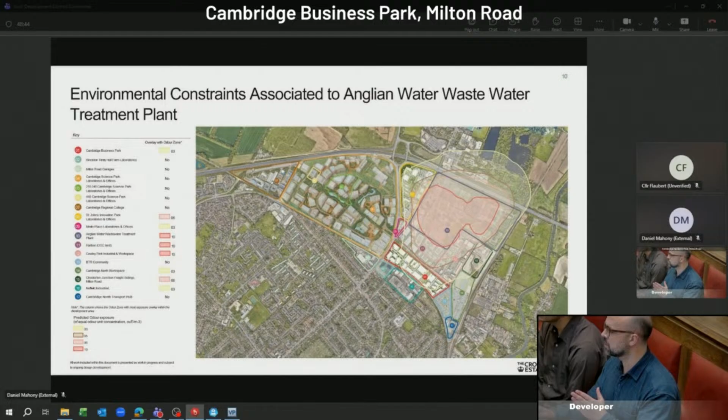So our framework has sought to respond not only to how we need to adapt to what was proposed in Hartree no longer necessarily coming forward in the same guise, but also how we've had to adapt the framework to maximise flexibility moving forward through the process, to facilitate homes potentially coming forward should that odour zone constraint no longer be in place.

This is a parameter plan we've developed which, given the nature of the application as an outline application, shows the land use aspirations. When we last presented to the JDMC, plots N, H3, H1 and H2 were proposed as residential plots. Subsequently, in order to ensure a deliverable scheme from day one, they're now proposed as workspace-to-residential switch plots, which means there are a number of scenarios within which the framework could come forward, varying on whether those environmental constraints remain in place or are removed in future.

Notably, we've also introduced, in response to both consultation and the environmental constraints, the additional opportunity for residential plots at plot K in the centre of the site, and also at plot A on Milton Road. Moving to the next slide, you then see the parameter plan in terms of our land use aspirations and proposals, and the illustrative master plan, which we are presenting throughout this pack, which puts employment plots within the odour zone as it currently exists as the deliverable scheme from day one, noting there is greater flexibility moving forward over the duration of the potential build-out.

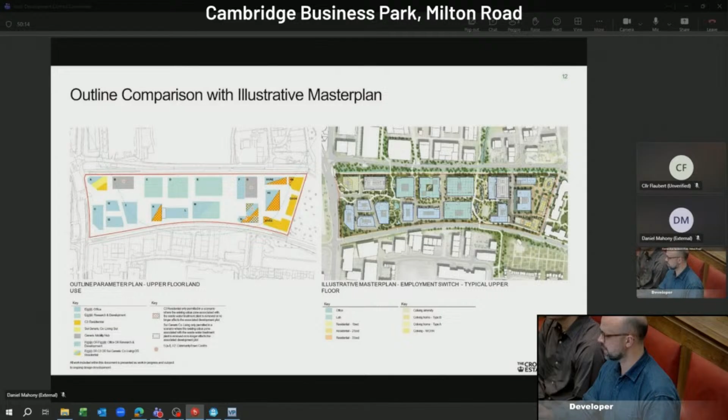Okay, we're now going to take you through the placemaking principles. So we presented a version of these principles to you last time we saw you, but they've since been updated and we've added additional detail.

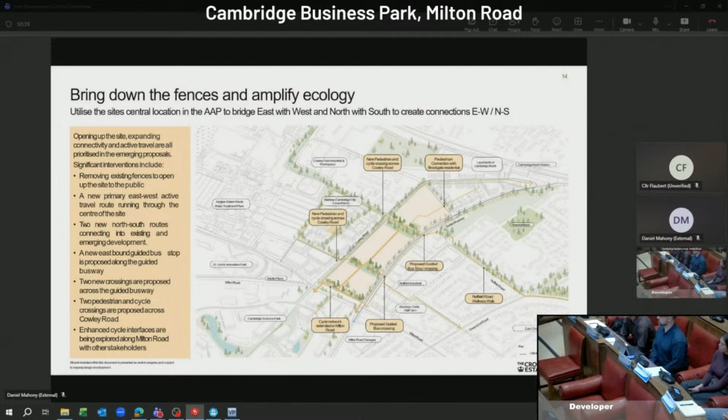The first principle is really to bring down the fences to allow people into the site. We see this as a site that can connect existing neighbourhoods to the south, to new developments coming forward to the north, and to all the development around Cambridge North Station and the Science Park. We're aiming to amplify the ecology around the edges of the site. There's a lot of existing trees, and we want to retain as many as possible and really amplify the nature that's already there.

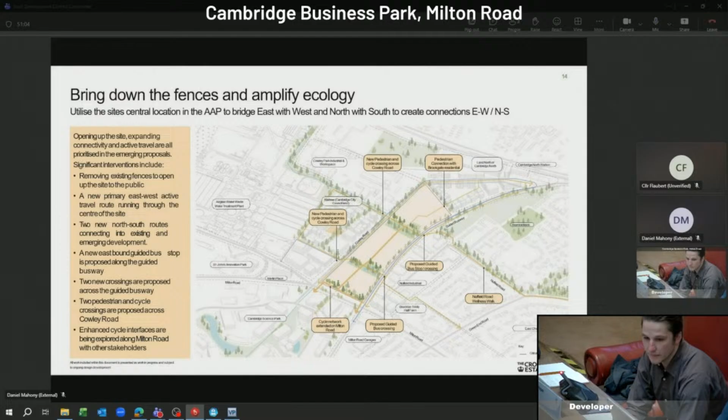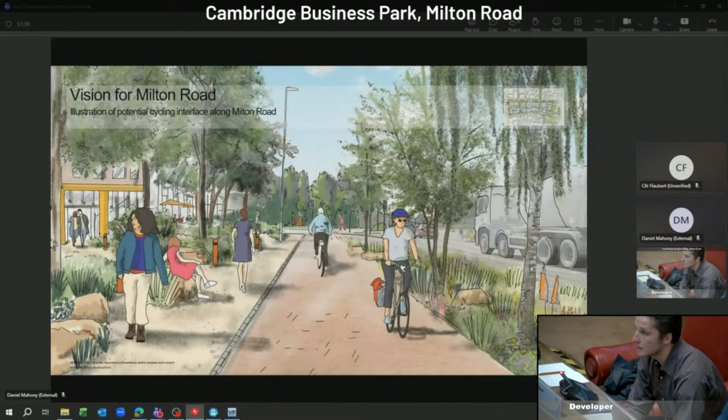This is a sketch along Milton Road, very much an illustrative drawing, but looking at how we can improve connectivity and improve the environment along the road. Any changes here would need to be done in consultation with the Highways Authority, but we think there's real potential to make improvements, particularly at that interface at Milton Road, where the cycle infrastructure is currently not particularly segregated or good.

That allows the rest of the master plan to very much be focused on pedestrian priority space, so there aren't any roads running through the centre of the site. We then have significant green spaces that form the interfaces between these different clusters.

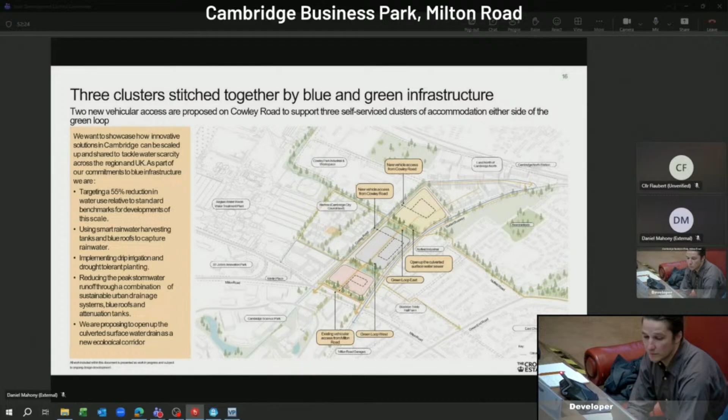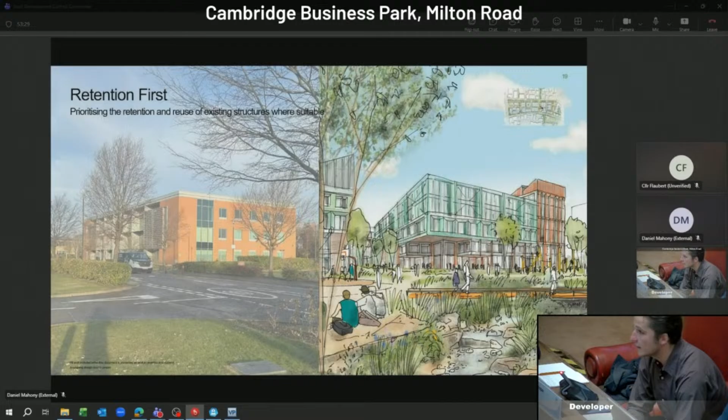This sketch shows one of the existing buildings on the left-hand side and the car-dominated public realm, and then how that would be transformed. The existing structure would be retained, but the building would be refurbished into a modern lab and office building, and the landscape and public realm would be completely transformed.

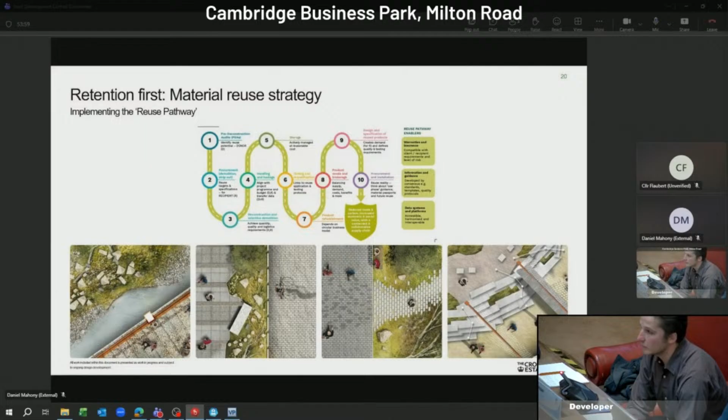We're looking at how we can reuse materials on site. The diagram at the top goes through the processes we'd need to use in terms of demolishing and storing material, processing it, and then installing it in another building or within the landscape. The diagrams on the bottom show a number of different ways we think we could use reclaimed materials within the landscape, whether that's the parks, the streets, or the playgrounds.

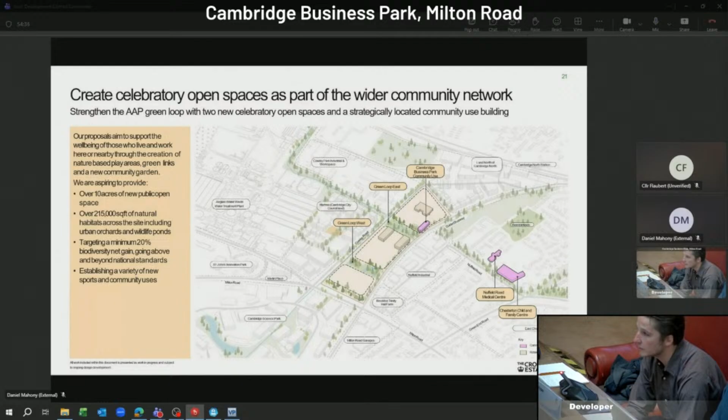This image is of the largest green space. Here we're looking to create more active uses that will foster a sense of community - things like play, sports, and growing space. We're also looking to open up a drain which is currently in a pipe underneath this space.

So that would introduce much needed new habitats and connect to the first drain, which sits to the north of this site and eventually leads all the way back to the River Cam as an ecology corridor.

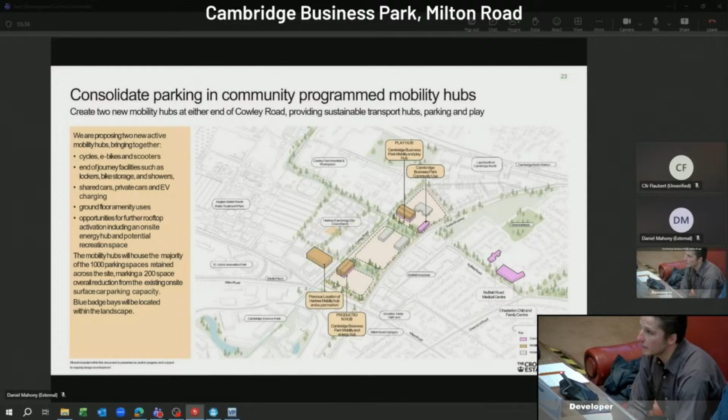This is a view of one of the mobility hubs, which we think could be focused around energy, so really seeing these as multifunctional buildings. They could have active ground floors. This one could have an energy centre that provides energy for the entire master plan. And really thinking about an expressive architecture that means these are contributing to the placemaking of the master plan as a whole.

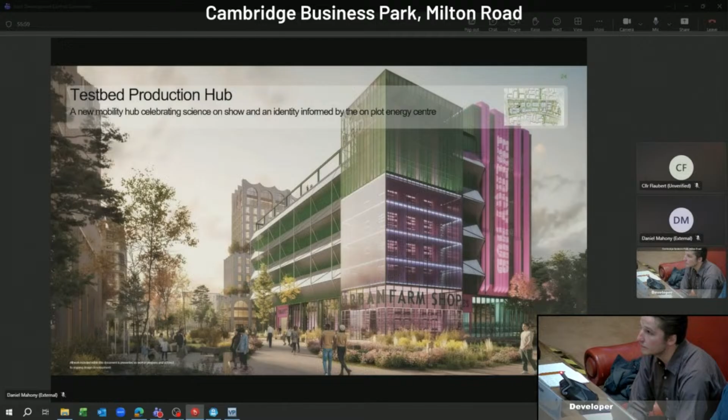Touching on what Matt was saying in his introduction, really trying to focus the energy on the centre of the site, on this east-west connection, both through public space, but also through a real mix of ground floor uses. We've heard through consultation that people really want to see more amenities, more facilities within the area - shops, restaurants, bars, health and well-being uses. So really trying to focus that in the centre of the site.

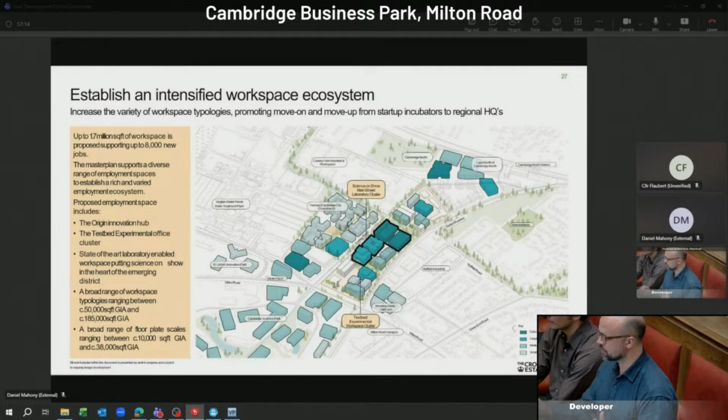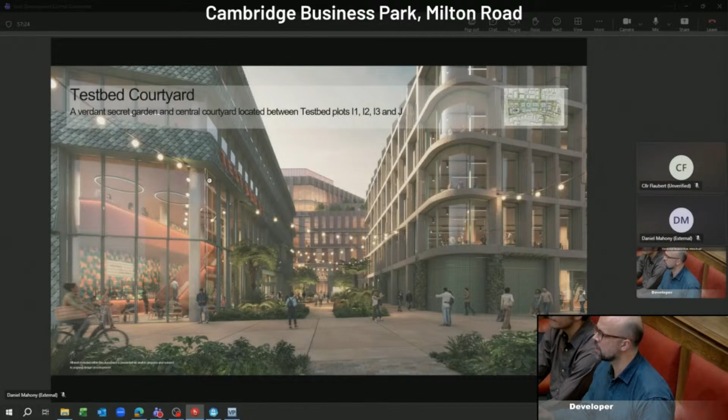Moving on through the principles, another key principle remains intensifying the workspace ecosystem, and in doing that, creating a really rich, diverse new workspace offering which complements the wider district as a whole, offering smaller buildings and larger buildings to stitch the district together, and also using those buildings to frame new public spaces of various sizes, including this smaller courtyard space as part of what we envisage could be the first phase of development, which we've named the testbed cluster and courtyard.

With regards to residential use across the site, we've referenced the fact that we've needed to change the strategy in response to the environmental constraints of the wastewater treatment plant, and we are currently proposing a 200 to 250 bed co-living building to mark the gateway into the site at Milton Road, outside the odour zone. We're also promoting, at the moment, around 190 to 210 homes to complete the street with the emerging BTR neighbourhood that has outline consent and is currently being developed.

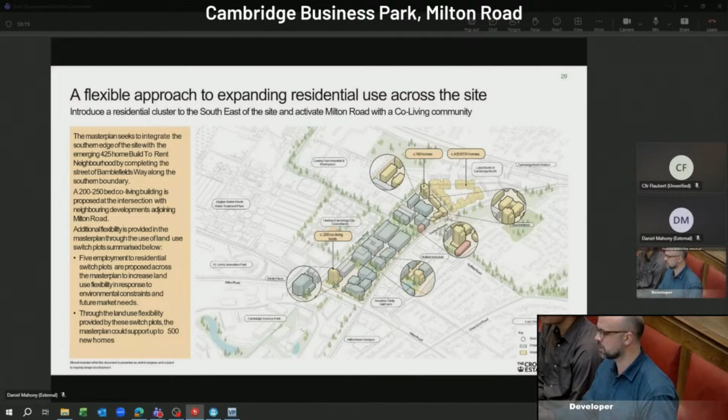What you'll see is a number of call-outs which illustrate how plots currently shown as workspace buildings could come forward as residential buildings in the future should the environmental constraints be removed, and that would facilitate up to 500 homes on the site. This is an example of the neighbourhood, the mixed-use neighbourhood residential garden as currently drawn within the illustrative master plan.

With regards to heights, the approach we've taken is very much in keeping with the wider district. We've established a largely 5 to 7 commercial story shoulder height. We've sought to maximise variety, to increase variety, to use height positively, to identify key gateways, as both a mechanism to establish wayfinding within the district, but also to ensure that North East Cambridge is integrated into the city as a whole.

I think it's in keeping with what Science Park communicated last week with regards to acknowledging that there's the historic centre, acknowledging that subsequently there's been suburban growth, but then equally acknowledging the kind of rightful need to maximise variety around the edges and to use height positively to integrate the new edge extensions into the city.

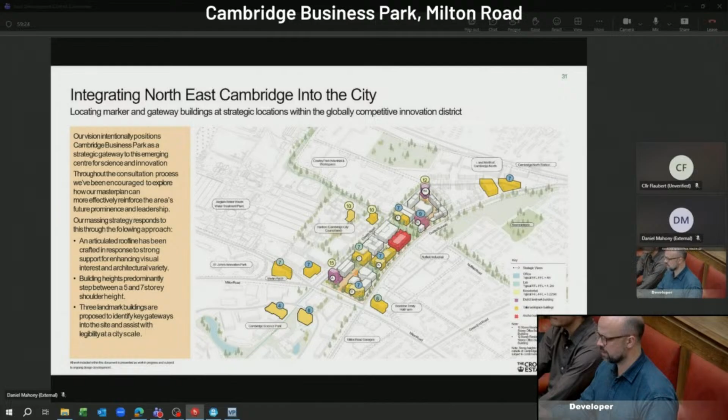This is an aerial view which communicates the massing in a more granular manner and how it responds to and reflects the emerging development around the site.

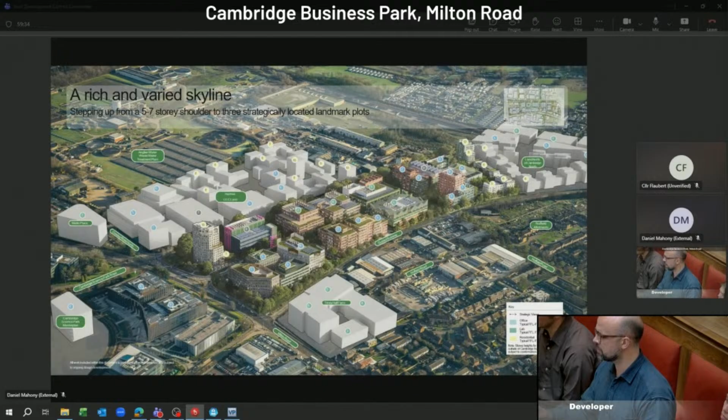And as we presented in June, we continue to support and champion a variety of characters across the framework, responding to different conditions. So we continue to propose and illustrate these 4 character areas as communicated within this diagram and as shared through the images which we've shared to date, each capturing a slightly different but complementary character and style.

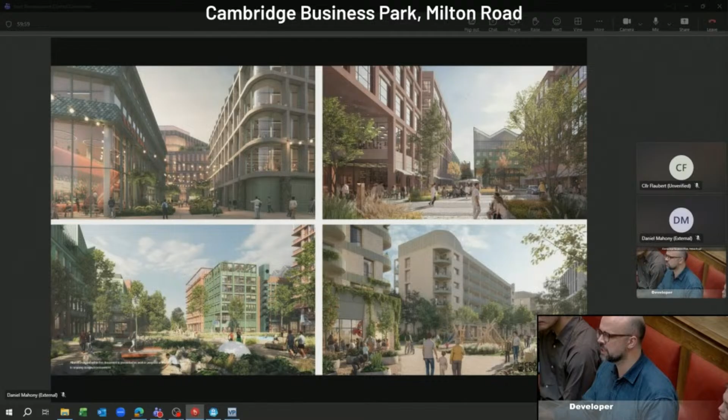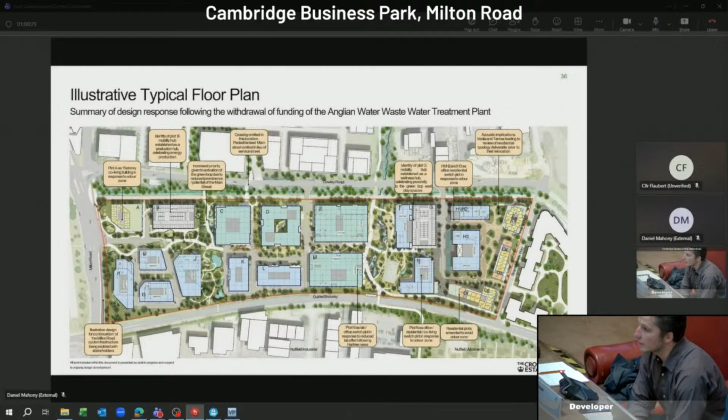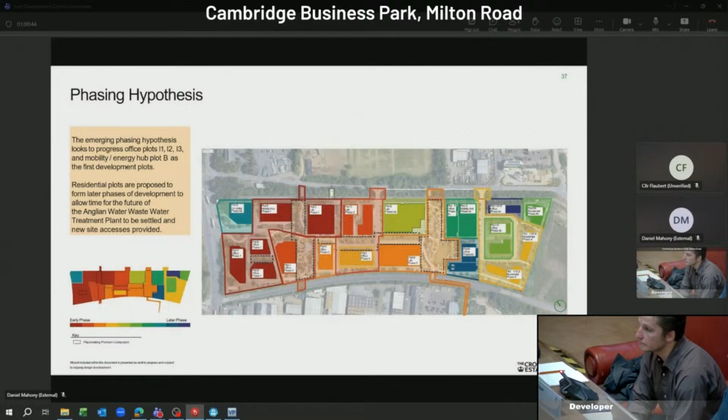We are very much thinking about phasing. It's an ongoing discussion, but we're developing a phasing strategy that will look at how this master plan would come forward long term. And then this is, yet again, just an aerial view that shows how the development stitches into both the existing context, but also the context that will be coming forward in the future.

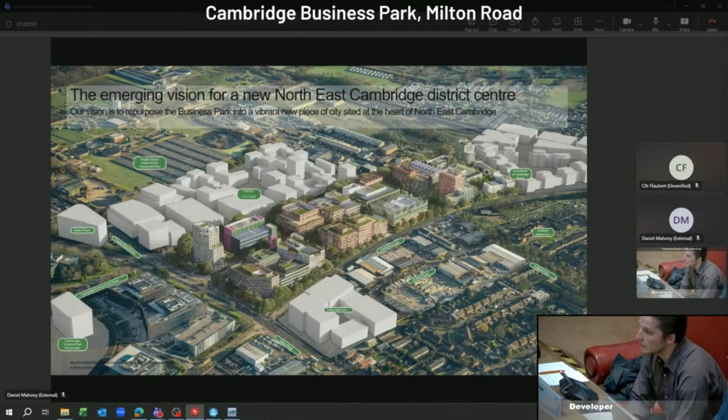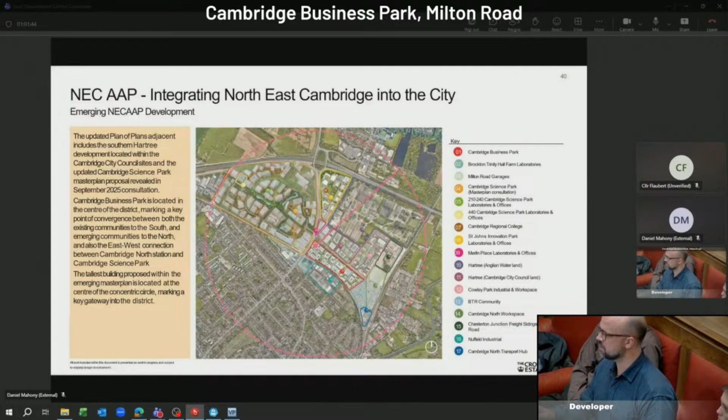This is an approach that's been supported throughout consultation, where 68% of our most recent consultation attendees supported delivering a variety of heights across the master plan. And then 82% of respondents in November also responded positively to the approach to landmark buildings within the master plan.

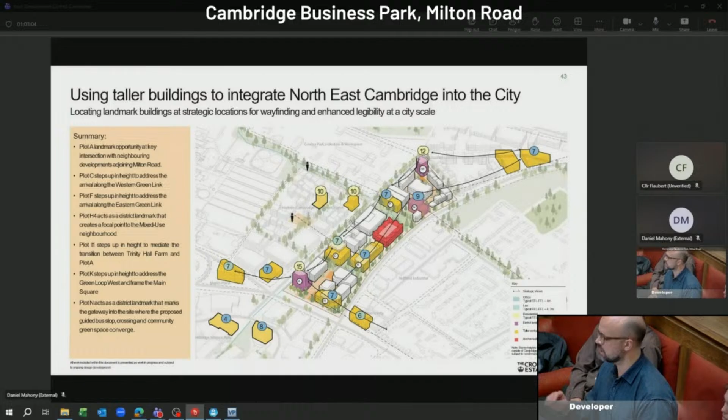The heights we're looking at exploring go up to 15 stories at Plot A, the co-living proposal at Milton Road, to really mark the centre of the district. Then there are two other landmark buildings proposed at gateways into the site: Plot N, which marks the entrance into the site from Nuffield Road from the south and the gateway to the new community green space, and Plot H4, which steps up from the neighbouring development to increase variety, legibility and wayfinding.

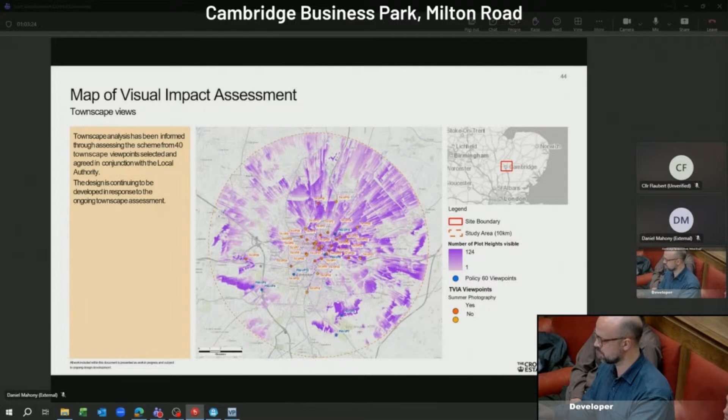The heights have been assessed from a huge amount of views in a very technical manner. This is the townscape visual impact assessment, where we've established around 40 different townscape views from which we've been assessing the scheme, and we've shared some of those within this pack, which we'll talk through now. So this is Red Meadow Hill.

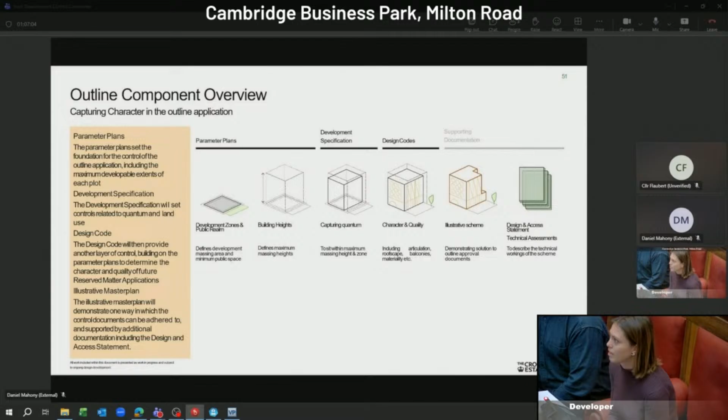Councillor Martin Smart: Thank you for the presentation. You've clearly thought about it a lot, but you've not presented it very well. I've said this before, maybe I'll say it again, but the methodology of showing us images from what's probably an A3 booklet on the screen doesn't work. I prefer to look at you and listen to what you're saying, which means I can't see the small text on the images, and often the pictures themselves don't really make much sense. That's unfortunate, but I still get the gist of it in a significant way, and it's great that you've got a master plan. That's good. We don't always see that.

So my questions are: on the consultation, your percentages, 65, 80 and 90, that's of how many respondents? On the residential and odour zones, parts of Milton and North Cambridge are within the odour zone residential, I mean. Is it because the residential that you proposed previously will not work in the odour zone, or is it because it's convenient for you to leave it out? I know that you can work with planners on that. It is possible, mitigation factors, etc., etc.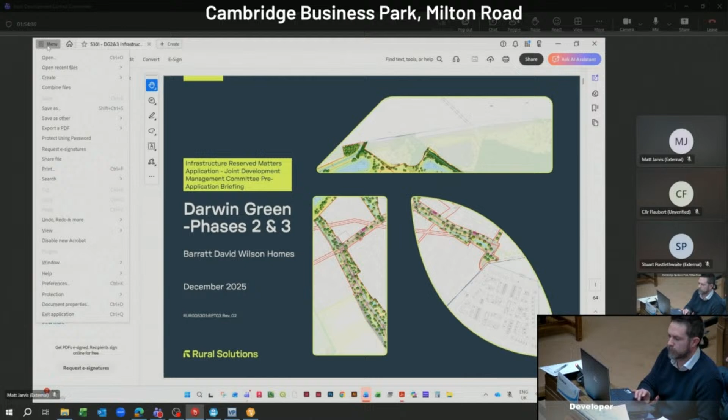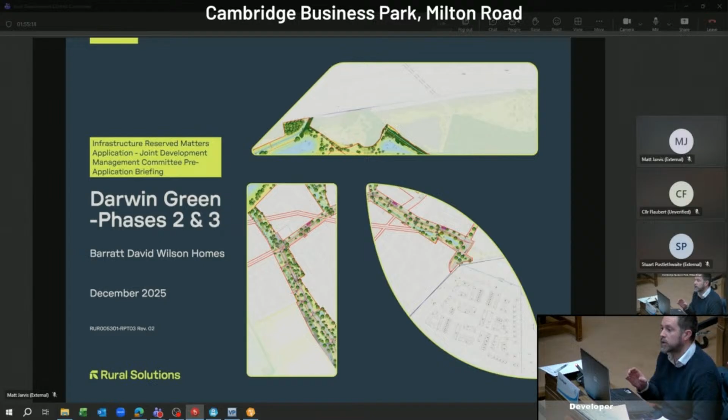Thank you very much for this opportunity to come and present the Darwin Green Phases 2 and 3 infrastructure RMA. This is a point in time. We've gone through various detailed pre-apps so far, we're not complete, we've still got some further work to do. We want to present where we're at today and gain your thoughts and feedback so we have time to address any comments. The team includes Bidwells, Rural Solutions, Wood Hardwick, Hawley and FPCR. The majority of these have been involved in Darwin Green for many years and have very good historical background and knowledge of the site.

There are 3 key themes that underpin this application: the need for the primary road, drainage, and hard and soft landscape proposals. The primary road includes details of the primary street, including footways and cycleways and wider infrastructure connectivity. The drainage includes a variety of SUDS detention basins which link towards the country park, and a range of SUDS swales and rain gardens associated with the streets and green corridors. Added to this is a layer of hard and soft landscape proposals covering the open space, areas of public realm within the RMA application, and areas of play. There's also a need to identify vegetation removal as a wider requirement of the RMA and the wider phase 2-3 works, and other works including earthworks, land raising, pumping station and utilities.

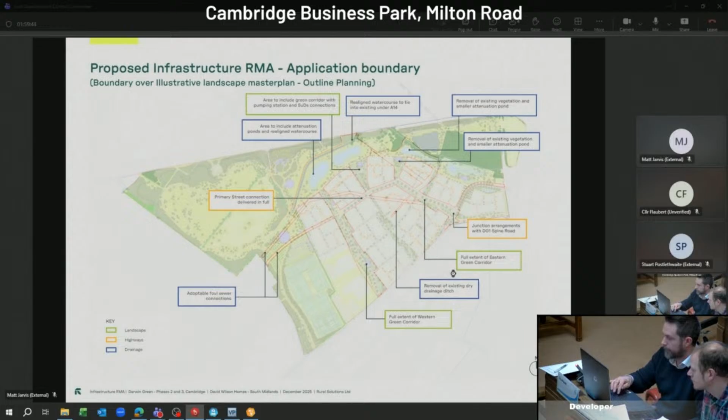This is a master plan of the site-wide proposals. So this shows the green corridors, the infrastructure at quite a high level, so I appreciate you can't see the detail yet, and we'll run through that.

It shows the strategic location between the A14 to the north, which is that bit there. We've got DG1, which is the first phase, to the south here, and then how this infrastructure phase ties in with the existing access road into Franklin Gardens, part of DG1, and then how it also provides access further down by the school, which we'll go on to in detail.

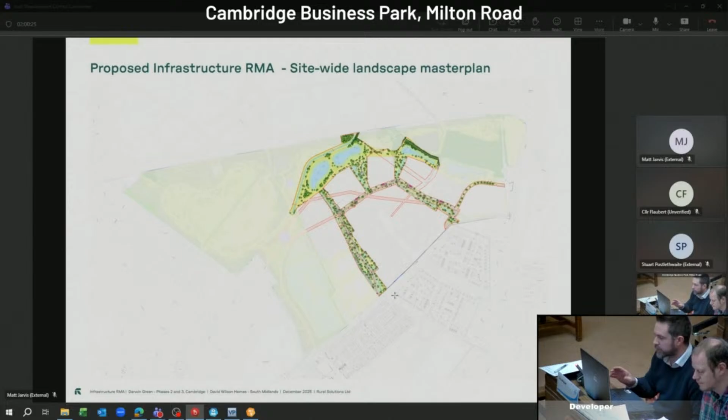I'll pass over to my colleague who will talk you through the connectivity.

As a result of the workshops with officers through both the design code and the infrastructure reserved matters applications, we've gone through and identified what we believe to be all the connecting routes to and from the development to the wider active travel routes and how the site sits within the surrounding area.

This includes routes to Cambridge North to the northeast, Girton to the west, along with routes to Huntingdon Road to the south via Darwin Green Way, with potential future links across the A14 and to Wellbrook Way via the country park. We've also looked at how people will navigate within the development in general to access the country park, public open space, community facilities, schools, as well as the wider strategic networks and the parcel interconnectivity.

In doing this, footways and cycleway routes have been provided along the primary street with suitable crossing facilities proposed throughout, either as parallel crossings, priority crossings and shared crossing facilities to help promote sustainable and active travel methods.

This slide shows where we've identified those key routes to be in terms of cycles, and the next slide is the same but for pedestrians.

We've come along to the main junctions coming into the Darwin Green development as a whole. In line with the approved plans as part of the outline consent, we are removing the on-street eastbound dedicated cycleway and replacing it with a bi-directional cycleway adjacent to the footway. The westbound on-street cycleway will be retained.

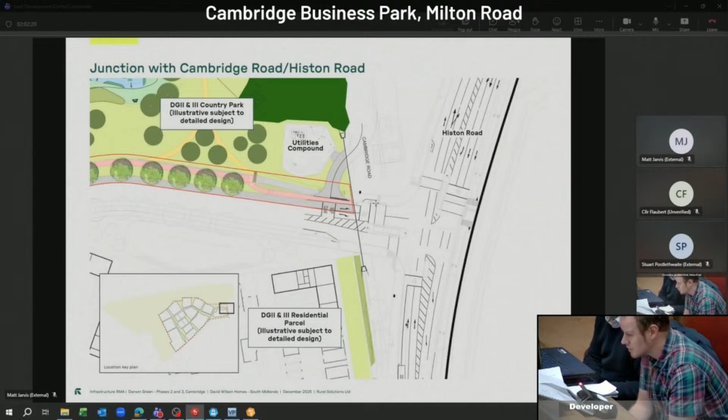As you come more towards the site access, we have a new vehicular access junction off Franklin Gardens, and we're providing a new parallel crossing across that, as well as one to the south, to help cycle and active mode transport connectivity throughout.

So these links will provide connectivity to the bi-directional cycleway that runs through the primary street all the way around, through to Girton and to the schools. We are still having discussions through the pre-app workshops, and Highways have recently identified that they would still like desire lines down towards Darwin Green 1, and it's something we're still exploring at the moment and how we are to achieve that.

And then lastly, the secondary connection, the western connection down towards Galton Road, adjacent to the primary schools. This is just a continuation of the existing road that's already been constructed as part of the Darwin Green 1 development, as well as connecting the bi-directional cycleway to the orbital cycleway that forms part of Darwin Green 1, as well as the footpath connection into Darwin Green 1 and the public right-of-way connections.

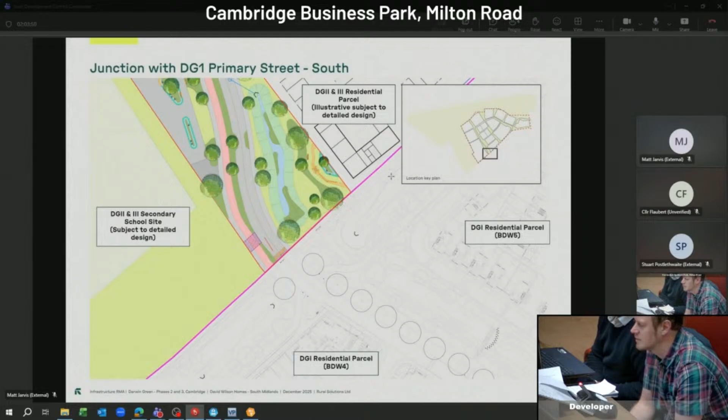Moving on to the detail, we felt it easier to present a sequence of drawings which provided members the opportunity to see how the spaces are being shaped. This design approach has been developed alongside significant consultation with officers, drilling down into the detail in terms of connectivity, character, climate change, sustainability, and placemaking.

Just on this, bear in mind that we won't be able to read a lot of the script on here, so you might like to highlight one or two bits.

Thank you. The idea of the notes in there is obviously the pack is issued beforehand, and for members who want to drill down to the detail as to what's going on, the notes are there to provide a level of description. Throughout this pack we've identified a number of sustainable principles, shown with this green S, that provides key sustainable ideas we're looking to integrate.

Staying on sustainability, features such as rain gardens included in areas of hard space work very well from a drainage point of view, but also for placemaking and helping with climate change.

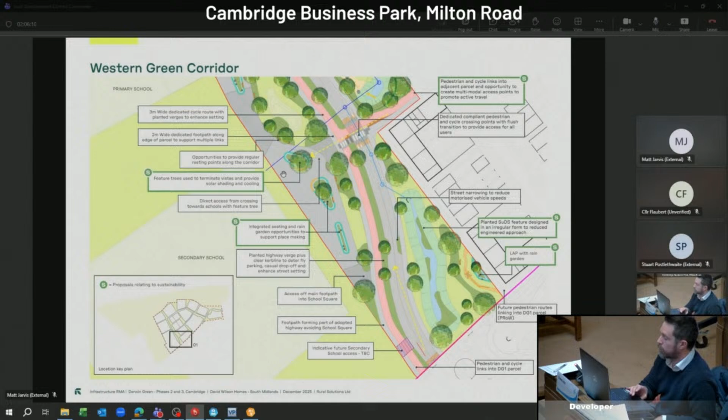So we feel that there are good connections, ability to increase dwell time, and also provide things like cycle parking, and the flexibility to work with the schools team on how they might want to influence the threshold boundary. I believe the designs aren't quite there yet, but they are starting to look at the design of the schools, so that will be something we'll need to do.

So really the kit of parts we've used as part of the design ethos is integrating SUDs within the landscape—we know we've got to drain the road infrastructure network, but also making sure we have a really strong landscape character all the way through.

And this thread, as you'll see, will weave all the way through these spaces. What these pages do is take you in a clockwise direction around the road, giving a sense of how we are addressing not only the road infrastructure, but also an emergent testing layout and how the residential parcel can help influence our connectivity and the spaces we create.

For example, here shows a leap play area and a lap combined to provide a play space which is protected through hedgerow planting and railings along the road edge, also picking up the need for good levels of clear pedestrian and cycle links, picked out through raised tables along the way. The raised tables help control motor vehicle speed and highlight where those crossing points are.

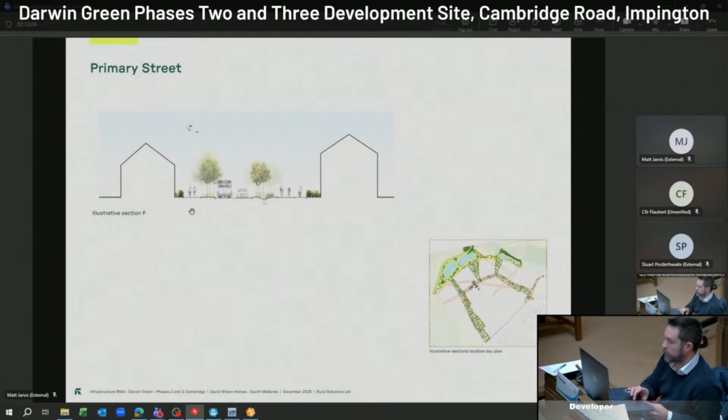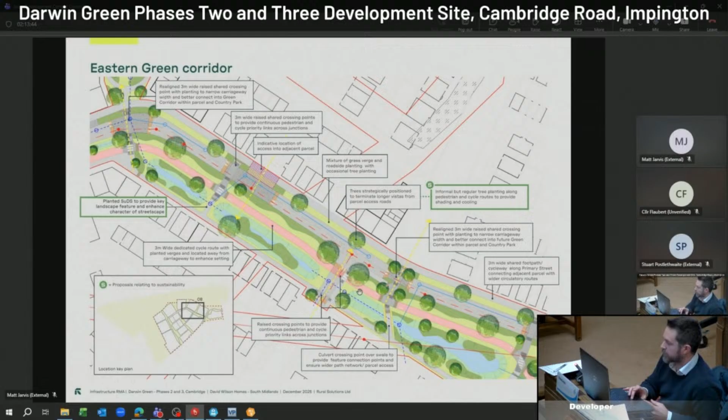Then as we come back round towards the main spine road, we have a similar set of components - a dedicated cycleway, shared pedestrian and cycleway to the north, and swales, planting, and a good level of connectivity across into each of the parcels. Again, this shows the depth of the swale, crossing points, and the relationship with the road.

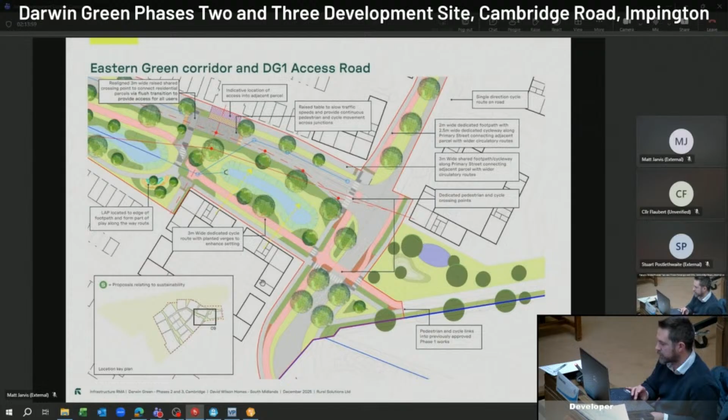And then as we get to the main junction, Scott has also mentioned how this arrangement works in terms of tying into DG1 to the south and into the Spine Road connection to the north. As we go further around, it shows the relationship through the country park to the north and the avenue arrival Spine Road there.

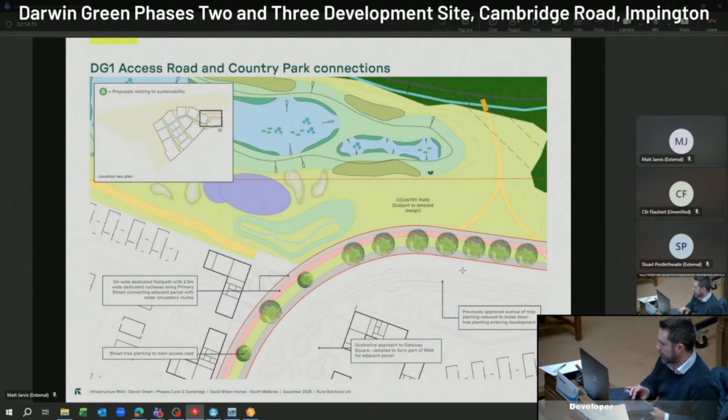To finish up, I wanted to highlight that we've got three strategic ponds to the north, and how the ponds link with the green corridors that take you from the infrastructure northwards into the green corridor, providing not only attenuation but links to high levels of recreation value and amenity within the country park.

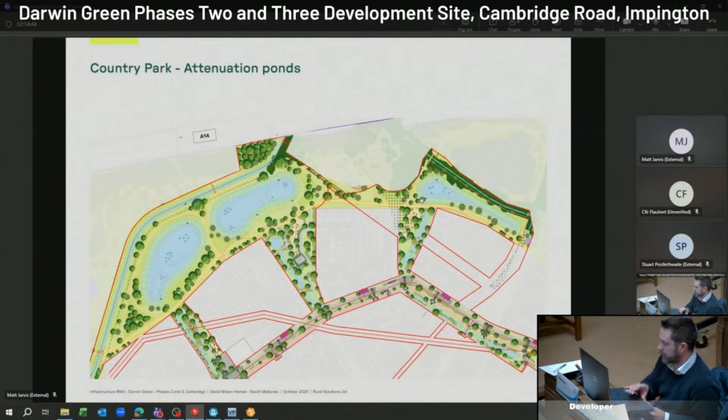Thank you very much, Matt, thank you very much. Perfectly timed.

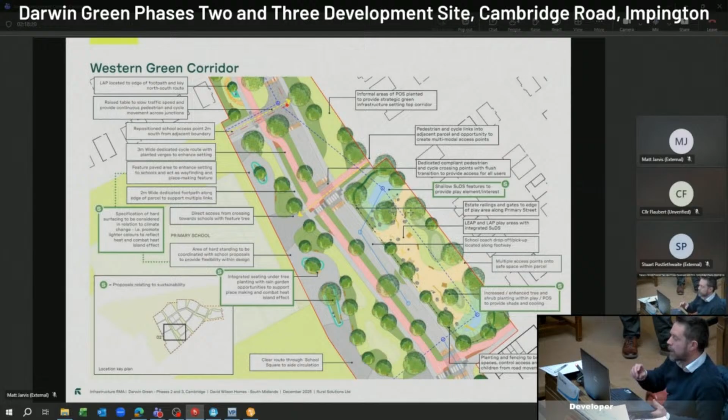Thank you, Chair. I just wanted to say I welcome the principle that you're starting from the landscape—I think that's very helpful and gives a clear indication of where there's going to be green space, which is good. So my questions lie around this: it illustrates wonderfully that you're planning to put a lot of trees in. The concern I have is with long-term maintenance, and whether these will be the responsibility of the Highways Authority, given there's a road going through here—it's not just cycle paths. So just be mindful of the long-term maintenance of the trees.

Also, on your diagram showing the cross-sectional view, you showed a single-decker bus, but double-decker buses tend to hit the canopy of trees close to the highway, so you might want to think about either the species you're planting or how close to the carriageway you're putting them. The other thing I wanted to ask about was permeability. I'm glad you're thinking about permeability with DG1, but could you also work with the landowners to the north, because it's going to be really important that people have access to that land. I know there aren't any public rights of way over it, but if you could negotiate with the landowners so they might consider some kind of public access—there's going to be a lot of people living here who'll want to use green space, and you've got a lovely country park planned, which I think is a very good thing.

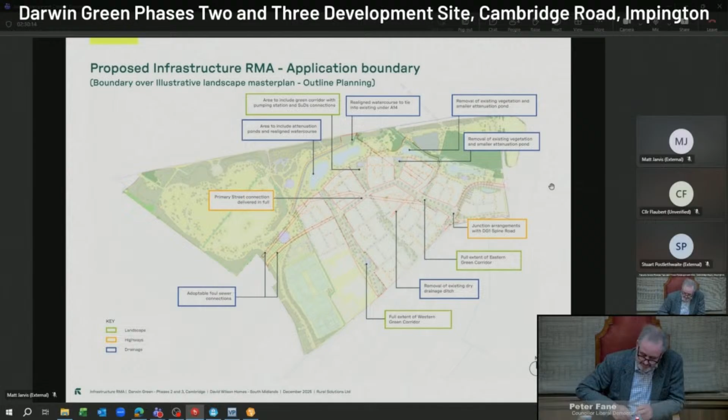I more want to comment on the country park elements, which are related and will also be related to your future presentations. I concur with Councillor Smith about the ponds being close and the potential division. They're also important as a feature, but I'm a bit worried that it might split up the park too much.

I'm particularly interested in the role of the park, which won't just be a feature for Darwin Green, it will be for the whole of North Cambridge. It will serve a very significant role in that sense, serving both Arbury, King's Hedges, the new Orchard Park development, and the parts of Girton adjoining it. So on a much wider scale, the role of any building related to that is important.

I've raised before the issue of Impington Farm, which had prior approval to demolish but hasn't been demolished. It has significant historic interest - it was the last farm from the enclosure period around 1806, and was apparently once a prize-winning farm. It's well approached and well accessible, so you need to think about how you use that. I've always liked the idea of having a city farm - we don't have one in Cambridge, but that depends on finding somebody to manage it. There's real potential there if it could be linked in.

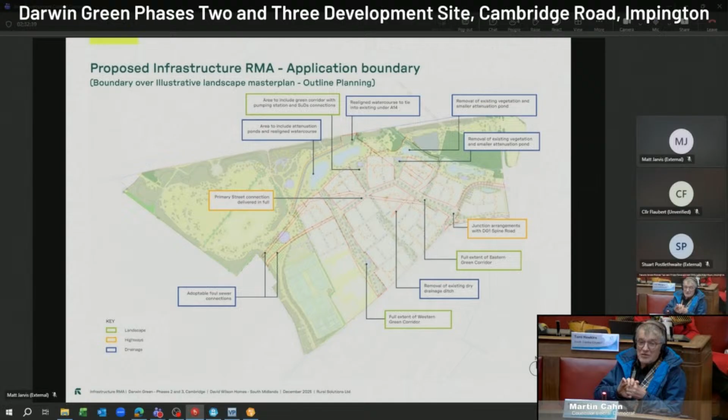Impington Farm also has high accessibility in that area, so there's potential for a wider centre for broader features, perhaps not just for Darwin Green. So those are my thoughts about that.

The only other concern I have - Councillor Cahn, that seems to be quite a range of things to address, did you want to add another question? I was only going to comment that I'm a little concerned that the water discharge might affect areas north of the A14. I don't quite know how it works, so I just want to make sure that's been considered.

Any response on those points? Yeah, I can pick up the response to the grey area that sits outside of this application. If you can see my cursor there, that's the grey area you mean. The idea is that it would be a depression landscape, a wet kind of woodland, a wet area of planting that would act as a bit of overflow. It's there as a feature, it's there as a habitat. There isn't one on the site, and what we were looking to do was try to vary that habitat because it's located quite nicely next to a ditch there, so we felt there was an opportunity to maximise that kind of habitat.

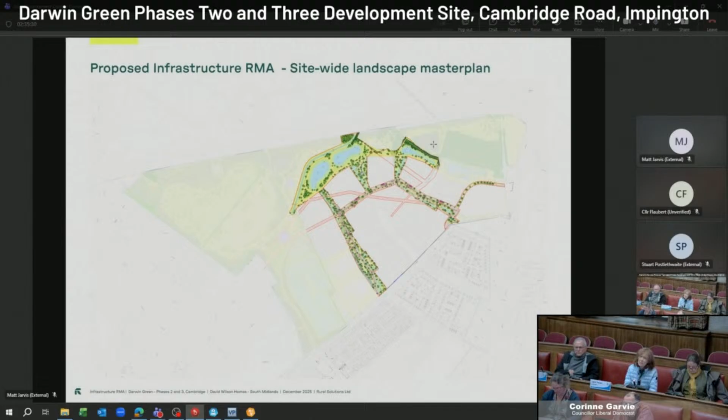I just wanted to ask about the passageway into Wellbrook Way from the country park - that was proposed some time ago. Did I hear you talking about it earlier? Could you expand on that?

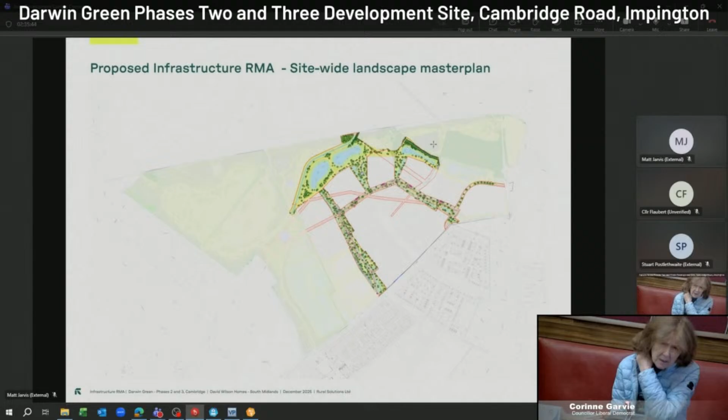The connections into the boundary along the edge of Girton - the intention is very much still to connect into Wellbrook Way. We can provide the path network up to the edge of our site; we believe Taylor Wimpey own that bit of land, and discussions are still ongoing, so it becomes a legal matter of how we do it. But the intention is that we join positively with existing residents so they get the benefit of the country park access. The same principle applies to Thornton Way and Thornton Close, giving us three connective points along that boundary to ensure local residents can gain that access.

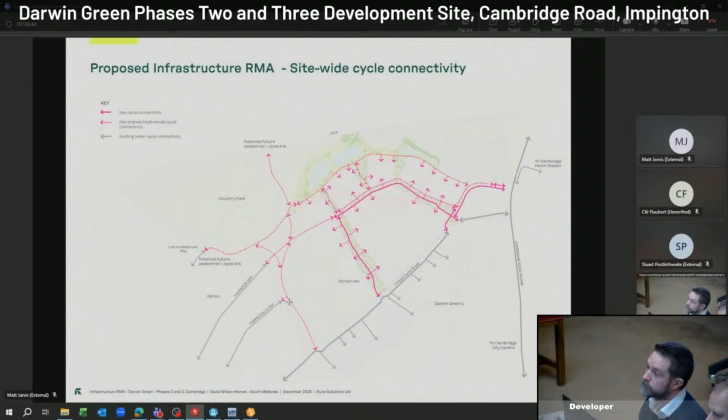I think Councillor Smith asked about the location of the community centre and how it might support the country park. We have wonderful Hobson's Park in South Trumpington, and the Clay Farm Centre is the nearest community centre to that, but some distance away - though that's now very successful. The relationship of the community centre to the park, I think, is a really important point and worth considering. I don't think any comment is necessary on that.

For myself, I just want to echo what Councillor Garvie was saying. I think it's always been important to the people of Girton in particular that the green corridor is maintained so far as possible. This country park will clearly be important in that. We're impressed with what you've said in terms of sustainability, particularly of the landscape. We will, of course, in due course be looking closely at sustainability of the construction as well, and no doubt you will come to that and have that all in hand.

A fair bit of the focus today has inevitably been on cycle paths, and we have this situation, which Councillor Smith referred to, increasingly in Cambridge and the surrounding villages, where paths that used to be used by cyclists going at a fairly steady speed now have cyclists going anything between 5 and 25 miles an hour, plus electric bicycles, electric cargo bikes, and electric tricycles, hopefully going at less than 15.5 miles an hour, but not all of them. Plus we sometimes have, on or close to the same routes, walkers with dogs on extending leads. So it's becoming more of a conflict zone, even if we can get people off the roads. I get the impression that is something you have very much in mind in the way you manage your cycle paths.

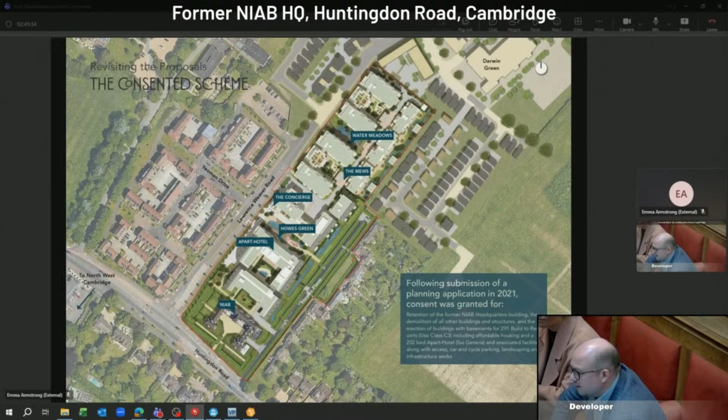Thank you, Peter. We've got quite a lot of information in this pack, and I'm worried 25 minutes is quite a short amount of time.

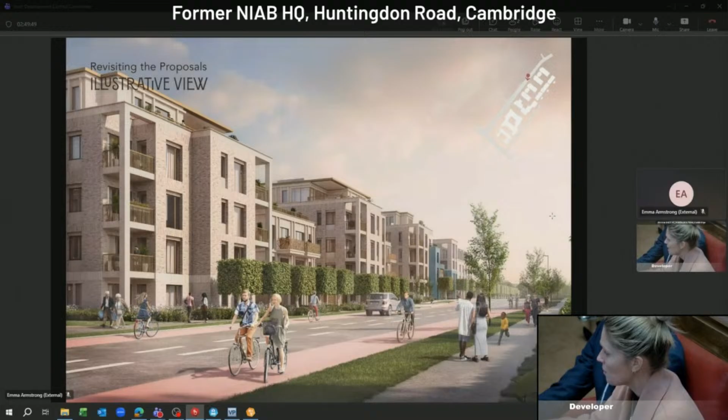Peter's introduced that there is an existing consent on the site, and we've worked on this for the guts of 8 years now. We were really pleased with where we got to in 2021, and it got consented with a signed Section 106, but the world's evolved in that time through the way we live, and most importantly, economically. So we have to rethink these new ways of living. We're doing this both in Cambridge and nationally, in and around London, Bath, Bristol, Manchester, everywhere, really thinking about affordability of how people work, but also social connectivity, trying to combat urban loneliness.

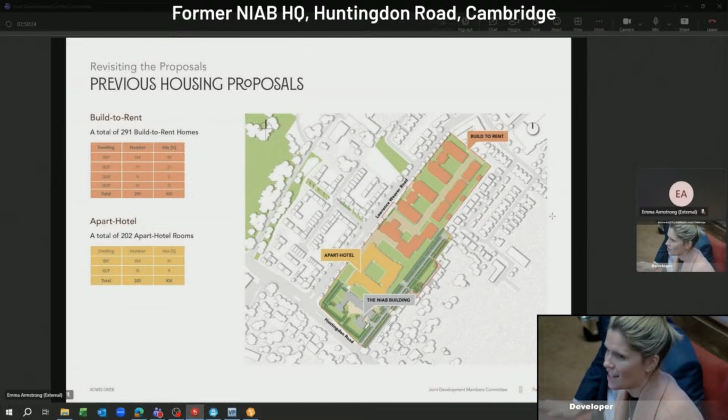We're trying to evolve these ways of thinking, and we want to start introducing the idea of potentially some co-living development on this site. We've introduced where we were, and I'll now go more into the co-living side of things. We'll touch on the site at the end, but I think we'll focus on this portion for our 25 minutes. As I've mentioned, we're really looking at blended ways of living.

We want to create a range of housing options and offers for the people not only of Cambridge, but the wider context as well. Traditional housing models are failing at the minute - people just can't afford to live there, but also you're looking to meet lots of new people and think about affordability and cost certainty. That's why with build to rent, co-living and also PBSA, providing that range of offer for the people of Cambridge is really important.

We've been exploring this, doing lots of designing of it, seeing it come to fruition, seeing it get built, but also lots of research. It's constantly evolving as a model. This started 10 years ago, and from where it was then to where it is now is completely different - we're going through multiple generations of it. So you have to keep learning and keep exploring to keep things fresh.

A bit of introduction to it: it's a modern purpose-built rental model. It's evolved from the BTR model, but it's a lot more about different ways of people coming together and having a lot more shared amenities. So you'd have your own private space, but lots of the amenities are shared, and we've been looking at different ways you might use these spaces - Dave will talk about that a bit more. But it's all about inclusivity.

This is a model where you come and pay a lump sum for one month, and that has everything included in it - your bills, your council tax, your rent, everything as one. So that cost certainty is really important.

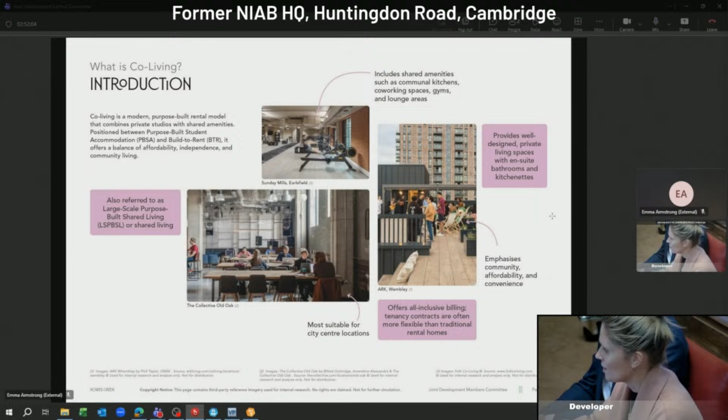As said, it's the housing cost and availability. We all know there's a housing crisis in this country, so what can we do to actually make this more available for lots of people. Lots of people are still living at home, but actually this model will get people out of the home and into establishing their own way of living outside of the family home.

The alternative to HMOs is really important, and I want to drive this home. I think that lack of quality in living conditions that people are living in, it's just not a good way to live. House shares aren't actually that sociable, and we find that these HMOs are cramming lots of people into spaces without necessarily having living spaces for people to come together.

So this alternative option is really important, and with these models there's a real drive for safety and security. It's about having a 24-hour concierge, someone there to really look after you, which you don't get with these shared models when you're potentially living with strangers.

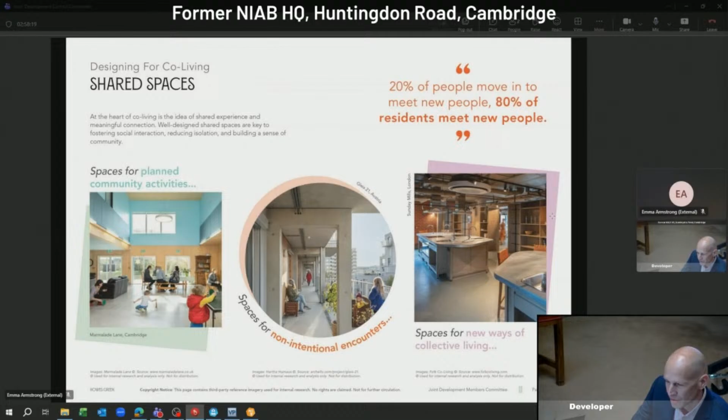Typically, co-living developments will include communal kitchens, lounge spaces, gyms, co-working areas, and particularly with increasing working from home, that's become a big challenge. People don't just want to work on their kitchen table at home, so the co-working spaces are really important in co-living, providing for different social spaces.

We found in our research that flexibility with these spaces is really important. You might have a space that provides dining tables in the evening, but during the day that gets used as co-working. And a variety of lounge spaces, terrace and external spaces as well are also really important.

I touched earlier on the programming of these spaces, so similar to BTR and perhaps even more so, these are quite managed. There'll often be apps, calendars of events, different sessions put on week to week, month to month, to really encourage people to come together, and we found these to be really good for forming friendships and the social community we're looking for within these spaces. This is a really important part of the scheme. Sometimes it's done by management, sometimes there are champions within the residents who live there who will organise or put on some of these types of events.

In terms of some key design principles we've developed looking at these schemes, we looked at design for diversity, so it's not just all about the bigger spaces for socialising. You want to make sure there's quieter spaces, supporting both extroverts and introverts, so a range of spaces. It's flexibility too, so something can host a party one evening, a yoga class another morning, a screening space another time - spaces that can serve different functions at different times of the day.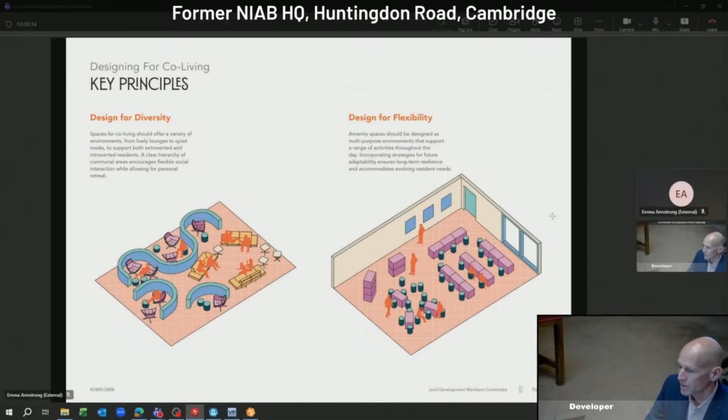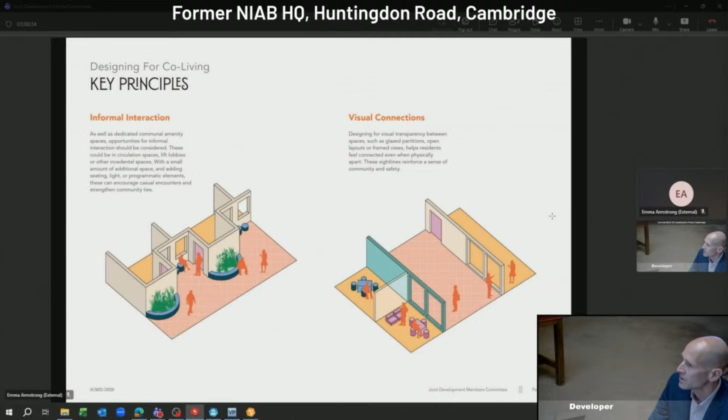Making sure we have these informal interactions, whether that's within circulation spaces or just ensuring amenities are located on routes that people take every day, so you're able to see whether or not someone's around - and that ties into visual connections, making sure the spaces are designed to encourage this community and interaction.

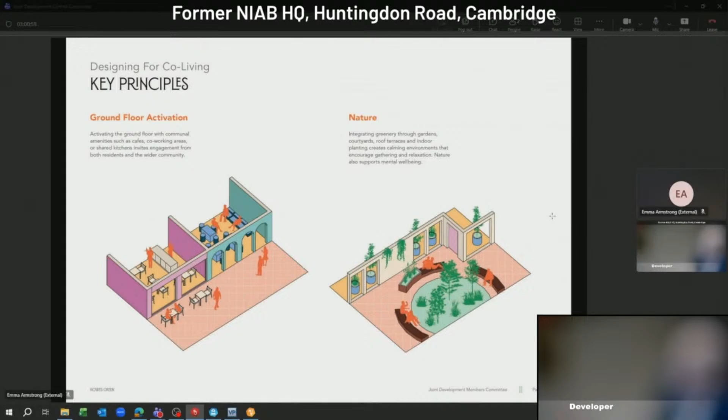Ground floor activation - these schemes are really good for putting front doors and active activities down on the ground floor, so that provides passive surveillance to the streets and spaces outside. Emma touched on the likelihood that people working different hours will feel safe in these spaces because they're well overlooked, well managed, and there are people there at all times. And then nature - again, creating external spaces as well as the internal amenity.

Touching briefly on the private studios: these schemes are a collection of small private studios plus shared amenity spaces. The most developed guidance on this is the London Plan, which talks about ensuite rooms with a small kitchenette so you can prepare food, desk space, and a small seating area. That's your private retreat, but the idea is you'll spend a lot of time in the shared spaces too.

As part of our studies, we pictured different potential residents and how they might move through the building and the different spaces they'd use at different times, to really understand what the best uses would be for these schemes.

We've done a lot of work on co-living schemes, as Emma said, in London, Bristol and elsewhere, and we've recently visited a number of different schemes, including one that just opened yesterday in Kingston. We're also working with different operators, who may or may not work on this scheme, to get their feedback.

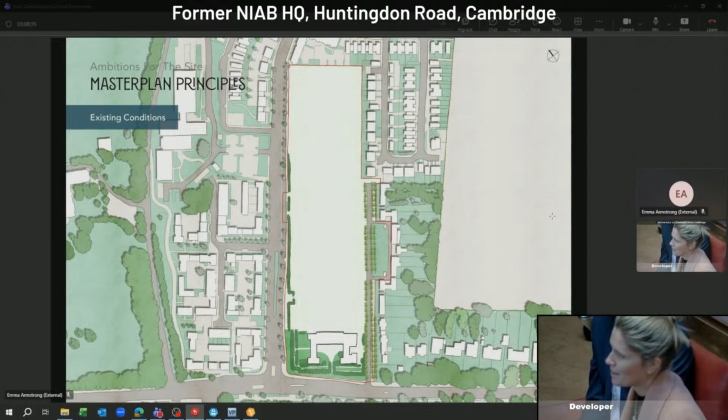Okay, so I'll touch on the ambitions for the site. We're still at a very early stage for the design process, but what the start of this document really says is that everything we established 5 years ago - we want to keep that high quality, ambitious design coming into what we're doing now, though things obviously have to change slightly. We previously had a basement, so we were able to put a lot of the ancillary space and cars down there, but we know sustainability-wise and financially it just doesn't make sense to do basements anymore. None of our schemes have basements, so we had to bring that to ground level - so there is a bit of change.

I think the main established design parameters are still there. We very much want to focus on the heart of the scheme. We've created Howes Green, which responds to the symmetry of the existing setting of Howes Place and the development in Lawrence Weaver Road, creating this heart of the development.

For access into the site, we've got the main entrance to Darwin Green to the north of this plan. That's where we create our main entrance along Lawrence Weaver Road as you progress towards Darwin Green. It's all about a series of gateways as you progress, so we've got the NIAB building sitting on Huntingdon Road, and then a series of marker buildings as you work your way up.

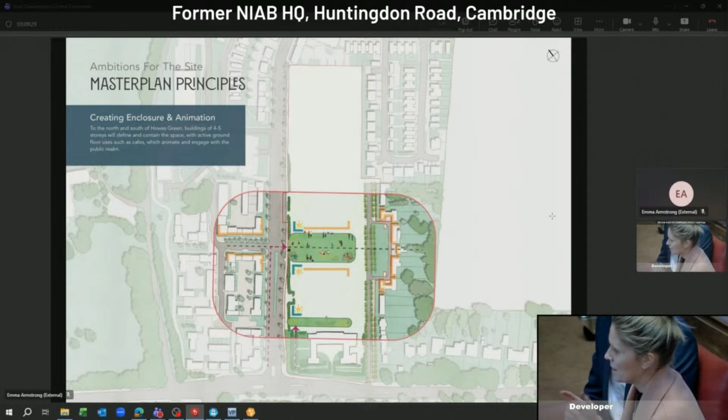The design aspect of activating and animating space is really important. So that green space, we want to surround with active overlooking uses, formally fronting it and making it feel safe, again responding to that formal character within the context, and then a more formal edge.

This again is very similar to our previous proposal. We had a formal edge which reflects the development to the west of it, creating a strong frontage along Lawrence Weaver Road, and a more fragmented frontage to Howes Place.

Previously this had buildings quite close to the development in Darwin Green, up to the north of the page. But what we've done is taken that further away, creating a greater buffer, and placed a mews street along that edge for more sensitivity. This is more important with the Howes Place residents, so we're creating a bigger buffer between our proposed buildings and the adjacent buildings on Howes Place.

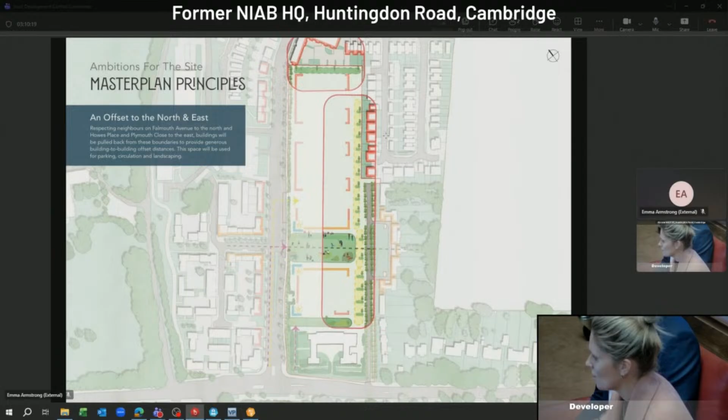We then have a series of building plots. Within each of these buildings there is a ground communal garden with homes overlooking it, so you can see these green spaces moving through the site, and then a mews road over to the east.

This mews road will be multifunctional. It will prioritise cyclist and pedestrian movement, but will accommodate some parking and servicing required for bins, refuse, and everything like that.

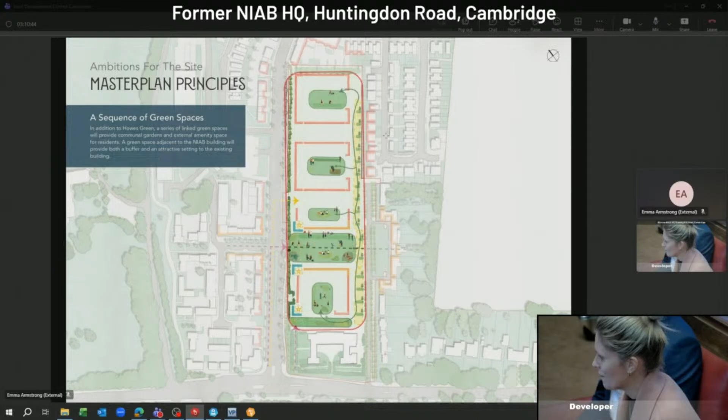Could you start to draw to a conclusion now? This is literally my last slide.

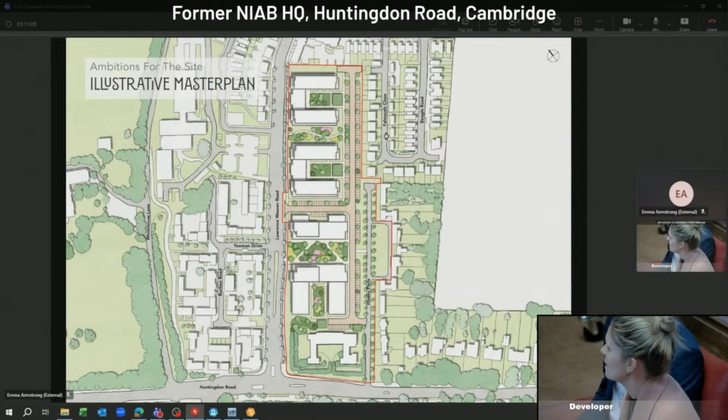Thank you very much. You can see an enthusiastic waving over there — this is an indication of questions rather than anything else. I'm going to start this time with Councillor Richard Williams, Councillor Tumi Hawkins, and Councillor Simon Smith. I'll come to the others.

Thank you, Chair. Just three questions. Firstly, I was wondering if you could say a little bit more about what the viability issues are with the existing consent, which I think is where you started off and said that was the reason why this was coming forward. I'd be interested in that.

Secondly, I was wondering if I could get some clarity on the rent figures you showed a few slides ago, where I think you were comparing it with an existing shared occupancy rent of £1,400. I had a quick look on Rightmove and found a lot of rooms a lot cheaper than that, so I was wondering if you could tell me exactly what you were comparing, because maybe you weren't comparing what I thought you were comparing.

Then, in terms of the issue of Cambridge, I'd be interested in the work you've done around graduate retention within the city, because Cambridge is rather different to London and places like Bristol, which are much bigger cities with more employment opportunities, so you'd expect less retention here. I teach at the university myself, I teach law, and very few of my law students stay in Cambridge — they all go to London because that's where the legal world is, not Cambridge. So I'm wondering if you could give us more detail about what research you've done on exactly what the demand would be for it. That would be helpful. Thank you.

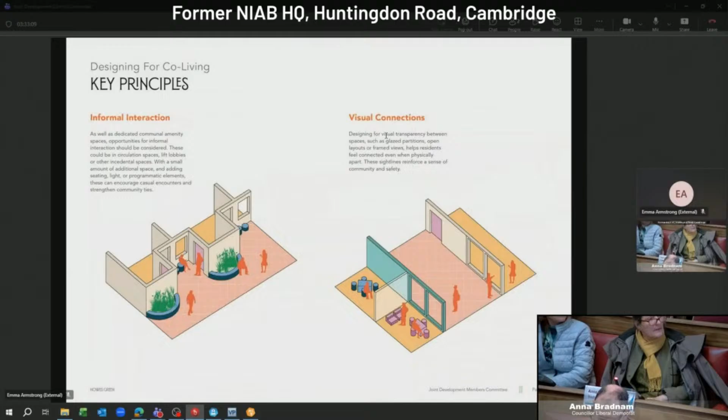Could you put up the slide of the size differences? I just want to have that there, the space constraints, as it were. Yes, so 22 square metres on the left-hand side and 38 on the right.

So what concerns, all of what the other members have said applies, and I just wanted us to be mindful of that. My questions were around, for example, who does the cleaning in this? It's a bit like Councillor Hawkins' question about the washing machine. Do you have to go out and borrow a shared hoover, or have your own? Where would you store it in that tiny space? Where would you put your washing when trying to dry it? Where do you bring it back? That sort of thing. There'll obviously be a concierge service for the shared spaces, but I'm concerned about this because it comes under sui generis. There is no national guidance about how we as planners can inform and frame this kind of thing that's coming forward, so I'm worried because we have no levers in sui generis applications.

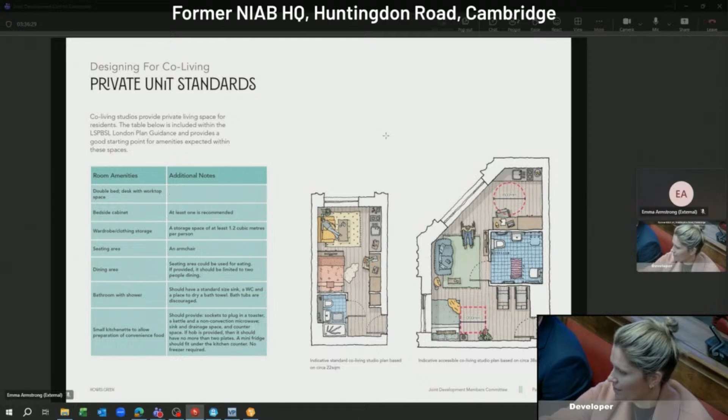So we have something in Cambridge which is very much like this, at Devonshire Gardens. It's all built to rent, with a lot of houses and studio flats. It has a lot of spaces like you're talking about—laundries, shared tool rooms to fix your bike—this is exactly the same. That is all built to rent, and that is all 20%, including the service charge, for affordable housing. That was dealt with by the City Planning Committee.

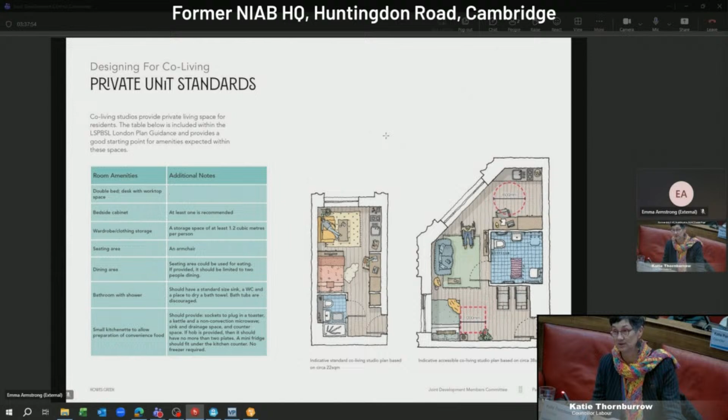Lots and lots of these conversations went through the process to achieve that with the Planning Committee, and that is in the process of being built. I'm really hopeful that will be very successful. The other important thing there is their bike standards—they chose to do one bike storage space per individual living there, not per bedroom. So I highly recommend you look at that, because it sorts out lots of these issues we've been talking about.

Okay, noted. Councillor Garvey—my question has been asked. Thank you. Right, good. Well, members, I think that brings us to the end of the questions.

I should perhaps have declared—I invited colleagues to declare an interest, and I should have declared an interest myself. Until, I see it was November of last year, I was a director of a co-living company, although we mainly focused on HMOs and serviced accommodation. The company has actually been closed down now, so I'm not directly involved anymore, but I have always appreciated the social...

Interesting, my computer is arguing with my assessment just now, so I'll have to check whether my declaration is correct. Siri clearly thinks it isn't.

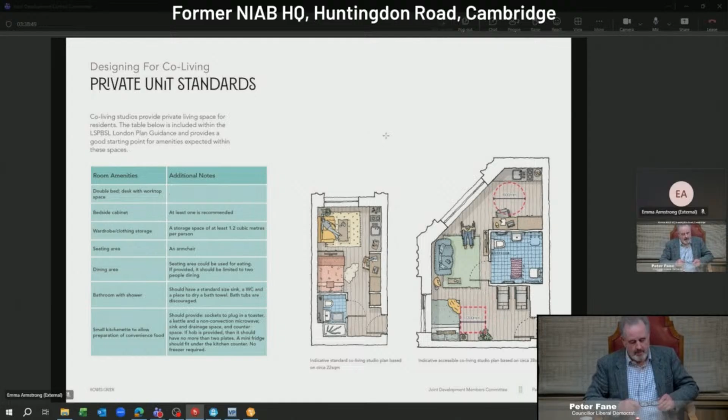But forgive me—I have always been entirely persuaded of the social benefits of it. I think in Cambridge we have more to learn on this. There are a range of options. We have a lot of experience of HMOs, many of them not by design, not necessarily doing it again.

It won't work anymore, sorry. Yeah, so we have experience of a range of options, and I was glad that Councillor Thornburrow mentioned the Devonshire Gardens one. There is clearly some ground to be made up here.

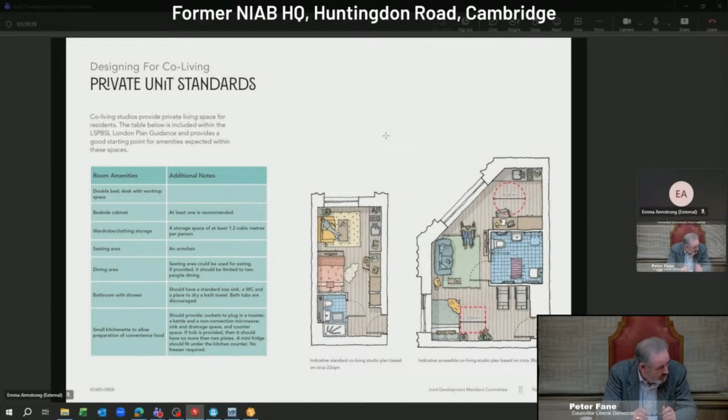I think a key focus will be affordability. You tackled that, but whatever the percentage of technically affordable is to be, it has to be an important benefit, in my view, of all co-living—more affordable as well as more sociable, less lonely, particularly for younger people moving into the area, although you rightly pointed out it isn't necessarily confined to people staying short term. Some will stay longer. So I think we as a committee, when addressing your proposals, will have more to learn, and it would be very helpful if you can relate them to examples, preferably some in Cambridge, although there aren't that many, so we can understand more clearly exactly what the implications might be.

Again, that's more of a comment than a question, so no need to respond. Members, I think that draws our discussions and presentations to a close. Just for me to thank our developers for coming along and presenting to us today. We appreciate all the time and effort that's gone into that and the thought that's gone into designing this. It's very helpful to us in our processes, and we look forward to seeing you at the next stages of this application. So with that, I will close this part of the session.